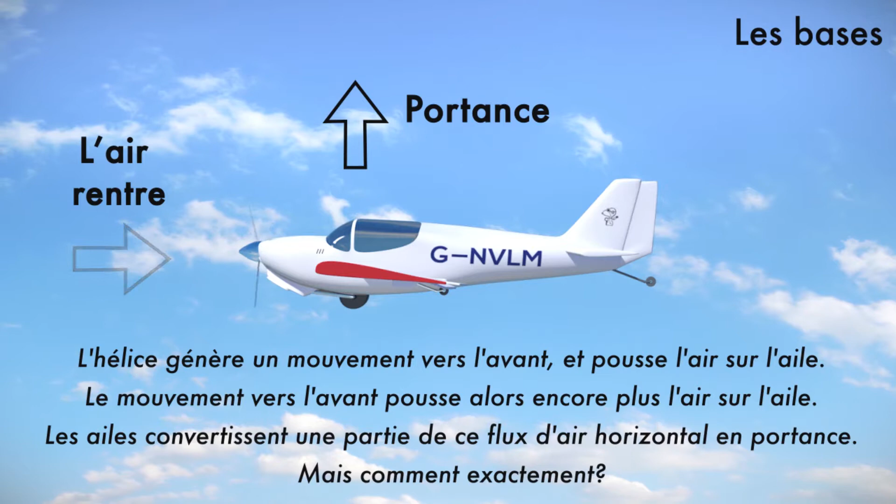In short, planes fly because the propellers push the plane forwards, pushing air over the wings. The wings then convert this horizontal airflow into vertical lift. The debate is over exactly how lift actually occurs.

I present two opposing views as to how planes fly. One view, taught at flying schools, is based on magic. The other view is based on a rational observation of reality.

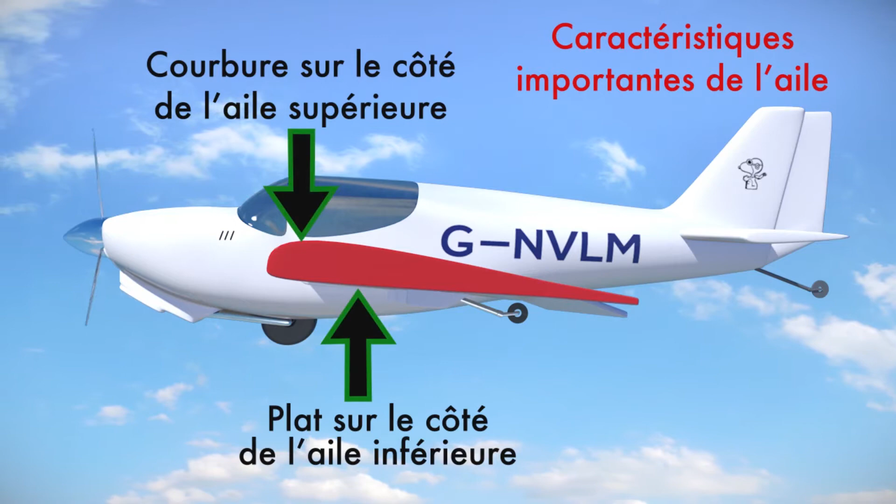Every pilot is taught that planes fly because the upper airflow increases in velocity when it flows on the curved part of the top side of the wing, creating low pressure. This process relies on something called Bernoulli's principles. This low pressure then generates vertical lift. We call this the conventional theory.

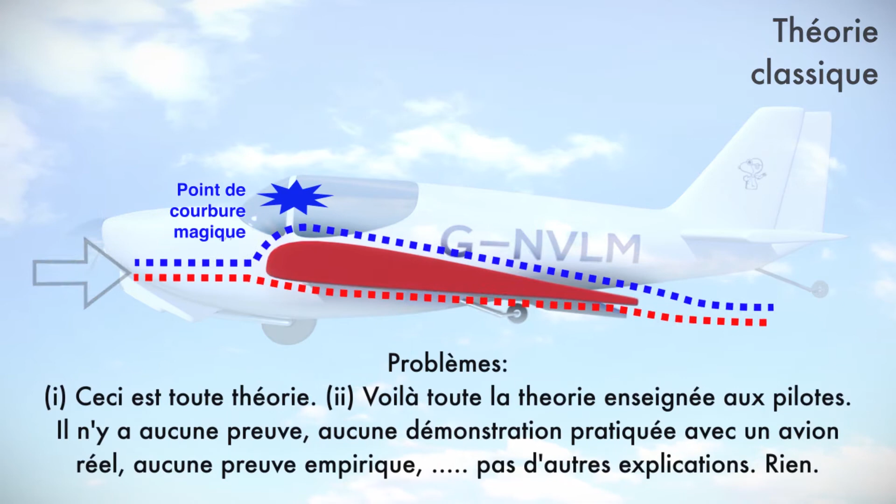There's only one problem. It's total bollocks.

It's obviously utter nonsense because it doesn't correspond to what we see in reality. Specifically, it cannot explain inverted flying where the wing curvature faces downwards, how aerobatic planes can fly with symmetrical wings and thus symmetrical curvature, how some planes can fly with only straight wings and no wing curvature, and how speedboats can generate lift without wings.

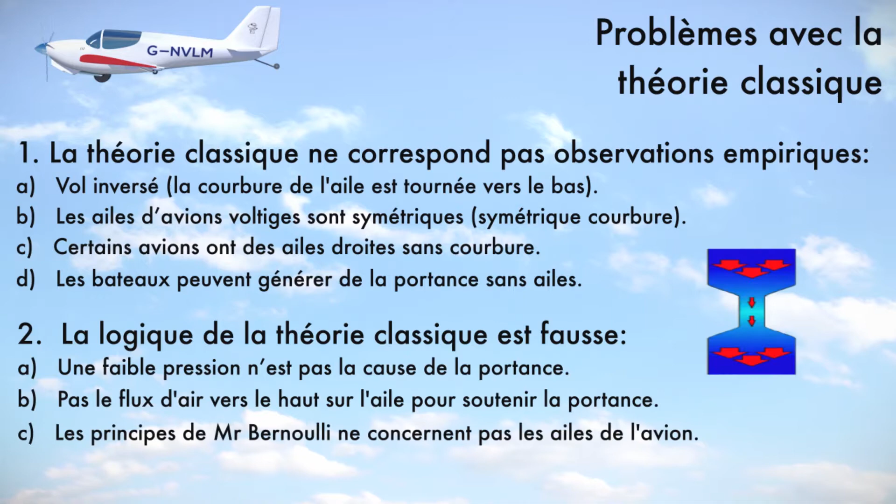Also, the logic of conventional theory is false. Correlation is not causation for low air pressure and lift. There is no upward airflow on the wing to support vertical lift. Bernoulli's principle doesn't apply to aircraft wings because they're not enclosed systems, and this theory can only describe a stall, it can't explain it.

For now, let's just focus on the first of these many problems. The conventional theory cannot explain how planes can fly inverted, as the curvature of the wing is now facing downwards, not up, so the wing should not be able to generate lift and the plane should fall towards the ground. Obviously this doesn't happen as planes fly inverted in the real world, so conventional theory fails.

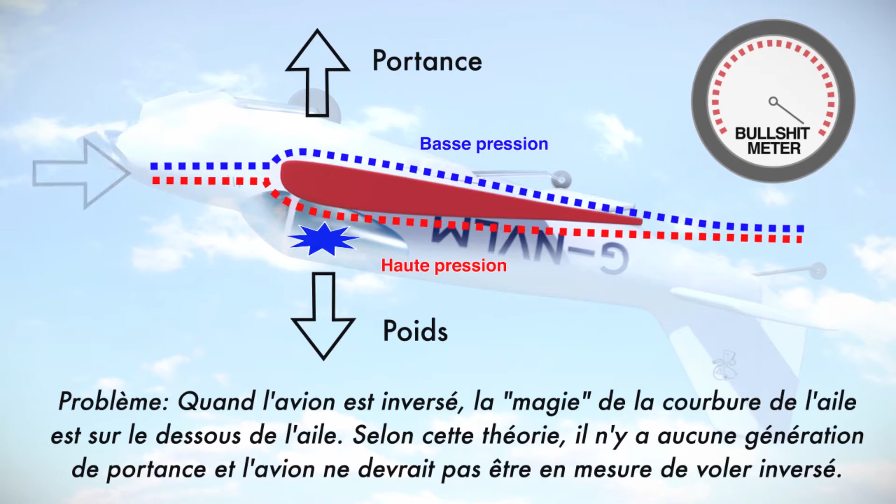Aerobatic planes typically have symmetrical wings with equal curvature on both sides of the wings. This would produce equal lift both up and down according to the conventional theory.

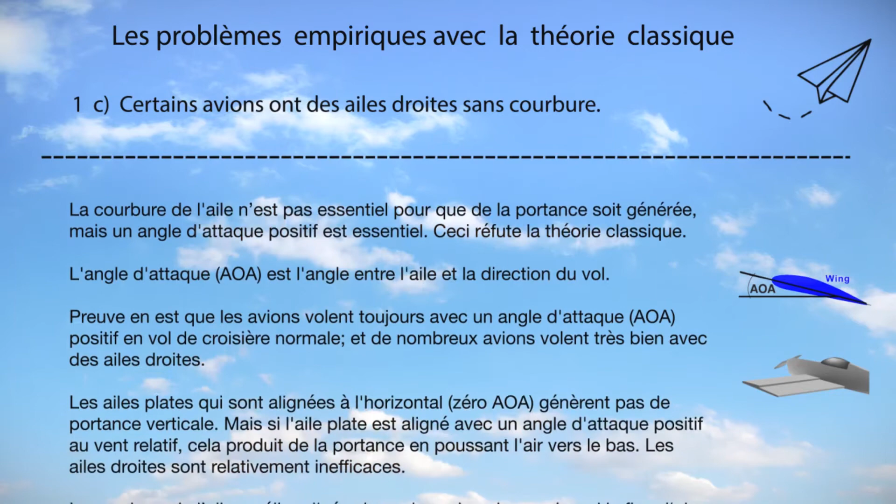Some planes fly just fine with flat wings. Wing curvature is not essential for flight. Critically, lift only requires a wing with a positive angle of attack, that is, a positive vertical angle between the wing and the direction of flight.

Boats can rise out of the water and float on the air for the same reason as planes. As the boat goes faster, it displaces a greater mass of water and air, pushing the boat upwards.

The conventional theory is full of logical fallacies.

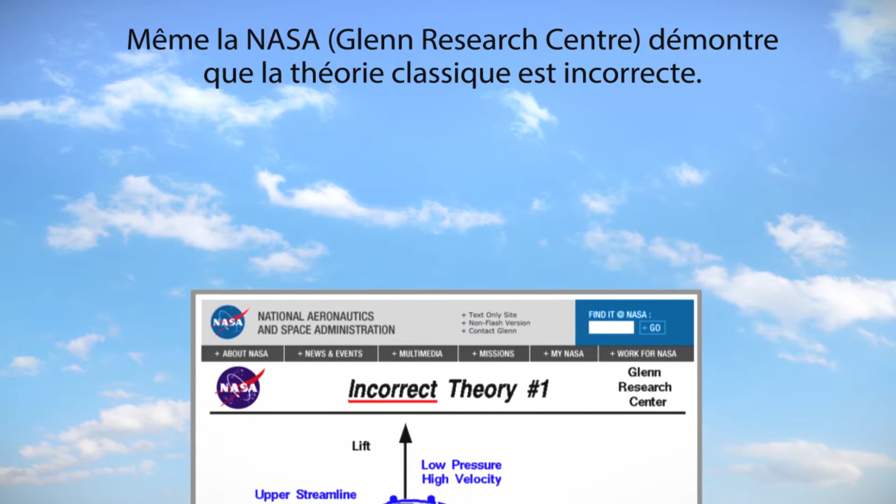Plenty of experienced and reputable people in aviation dispute the conventional theory of flight. Most flying instructors will tell you that the official explanation for how planes fly is incomplete at best. Even NASA claims that the conventional theory is incorrect. Go and take a look at their website.

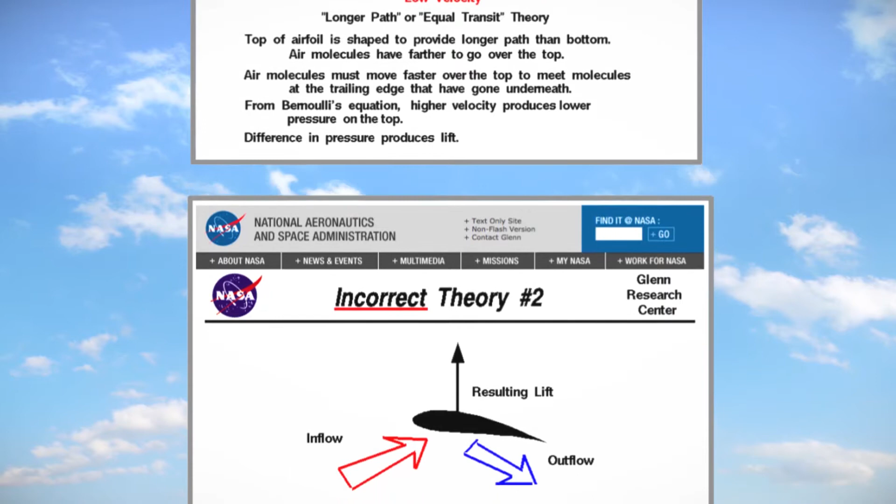The standard diagrams used by the conventional theory actually demonstrate mass displacement. Take another look at this diagram, which every pilot has been taught. It clearly demonstrates the mass displacement theory, with the air mass being displaced downwards. It's literally in your face.

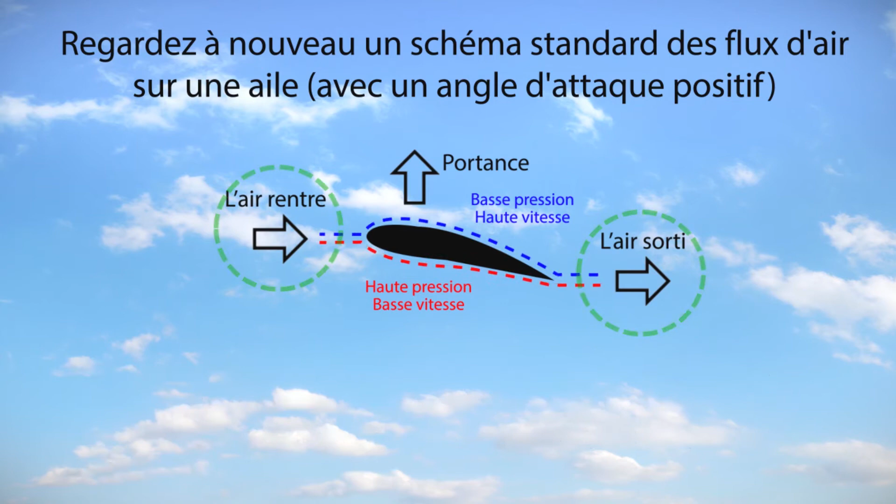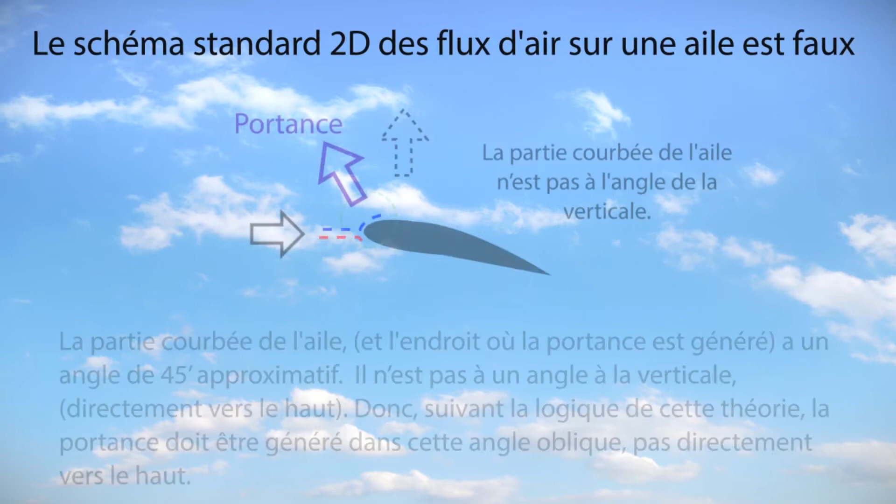According to the conventional theory, the curved part of the wing is where the lift is generated. But this part is facing at an angle to the vertical, not directly upwards. So following the logic of this theory, the lift should be generated in this oblique angle, not directly upwards.

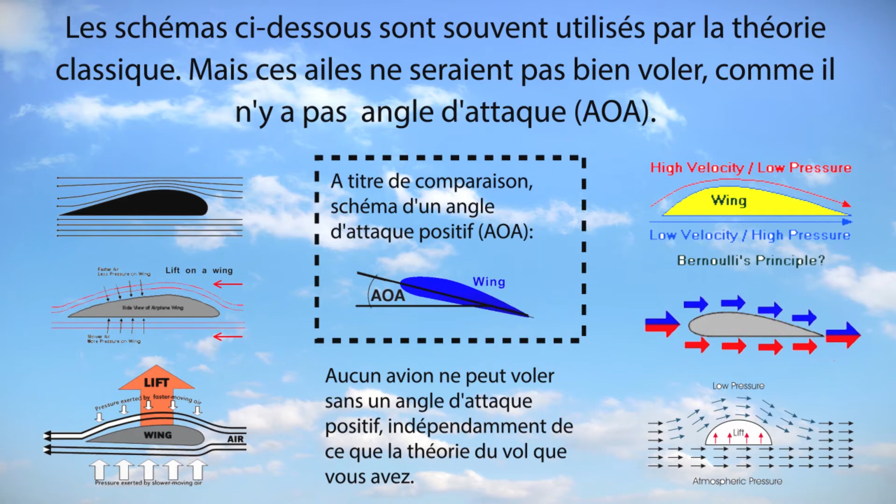The two-dimensional diagrams of airflows and wind tunnel experiments used by the conventional theory are so oversimplified that they're grossly unrealistic and inaccurate. The conventional theory uses diagrams such as these that depict wings that can't fly in the real world. Unrealistic diagrams, unrealistic theory. Garbage in, garbage out.

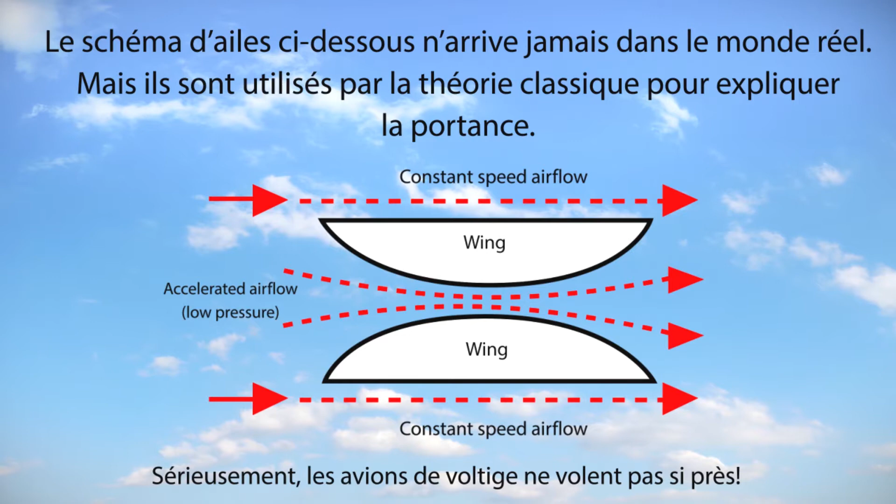Although these are unrealistic, two-dimensional experiments, they demonstrate the logical fallacies of the conventional theory. Strangely, wind tunnel experiments are never used to measure lift and prove the conventional theory to be correct.

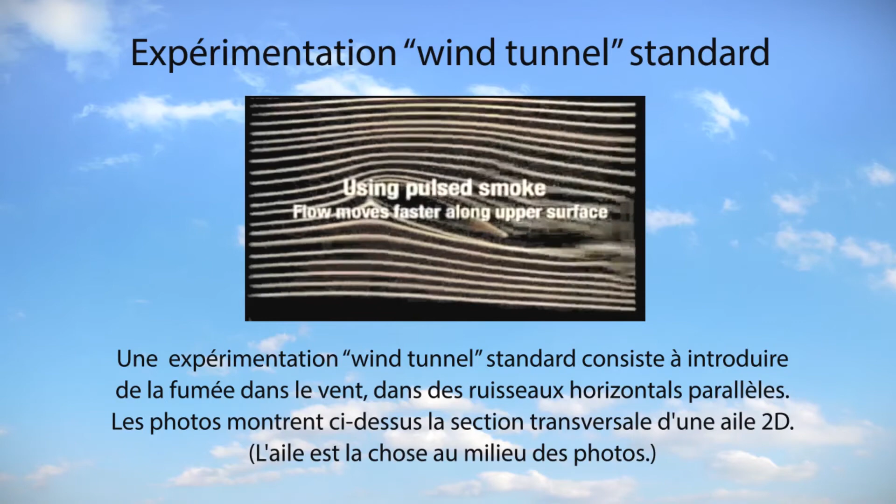A standard experiment involves a machine blowing parallel streams of smoke horizontally across a wing. Note how attention is limited only to the airflows that are close to the wing. The difference in air speeds between the upper and lower airflows are not very significant, so this cannot be a major cause of lift.

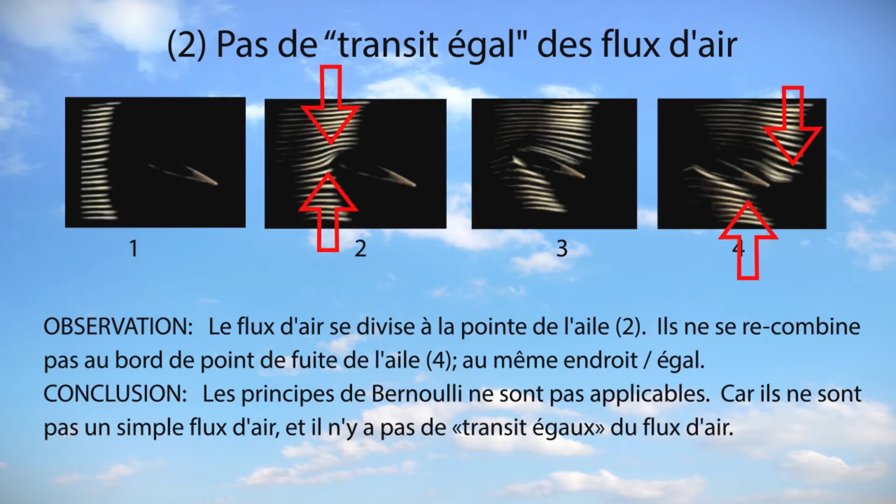This shows that the airflow splits in two at the leading edge of the wing and doesn't rejoin later. The air is not one stream of air, so Bernoulli's principles do not apply. The upper airflow doesn't increase velocity in absolute terms, so it cannot produce lower air pressure relative to this air mass above it, hence it cannot generate lift.

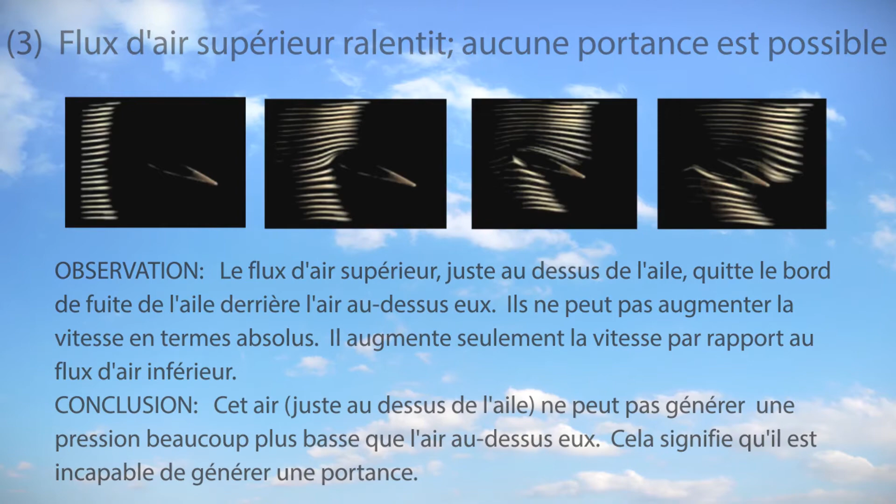Just to reiterate that two-dimensional wind tunnel experiments are so oversimplified that they are actually wrong. Airflow is three-dimensional.

These theories and principles of lift can be easily tested. Next time you're in a car, just stick your hand out of the window and see what causes lift.

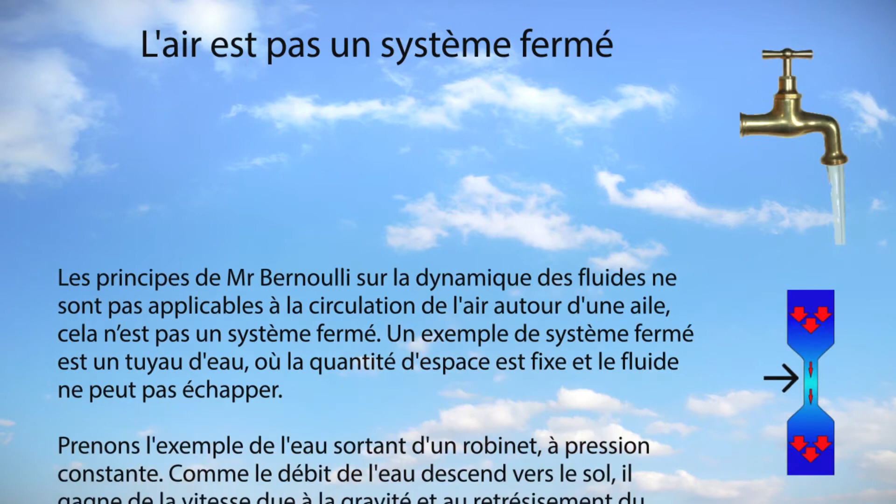Now we revisit the problems with Bernoulli in more detail. Bernoulli's principles are really aimed at describing fluid dynamics in enclosed systems, things like water pipes. Bernoulli cannot be applied to fluids like air and their interactions with wings, as it is not an enclosed system.

There are also two more conceptual problems with applying Bernoulli ideas to wings. Namely, these principles are most appropriate for moving fluids, not static air. The often quoted Bernoulli paper experiment is inappropriate as it involves paper, not a metal wing of a plane.

Bernoulli's logic doesn't translate to planes in flight.

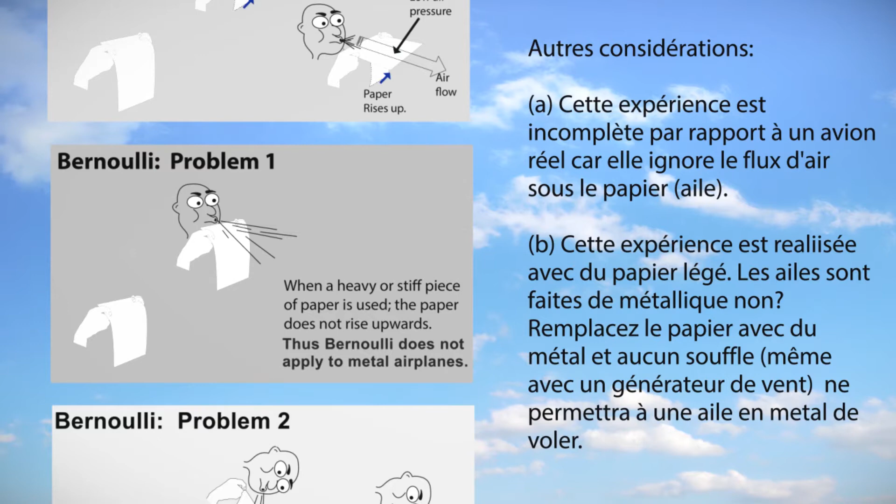Bernoulli lived in the 18th century. Who knows what he would have thought of people applying his ideas to planes?

Aviation can't claim to use Bernoulli's principles, as it doesn't actually use the Bernoulli mathematical formula and equations. One problem is that the paper never rises higher than the point of the blowing air, so there's no way for a low air pressure wind to generate vertical lift on a wing.

The critical factors that influence vertical lift on a wing do not include low air pressure on the top of the wing.

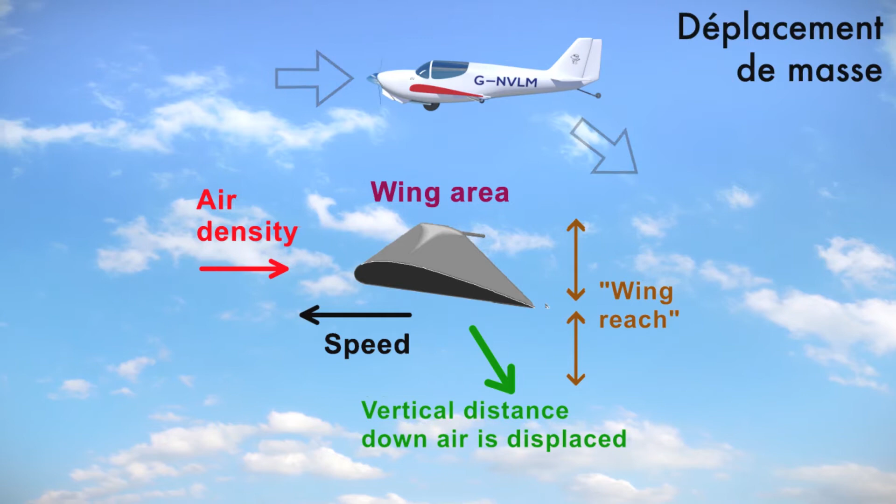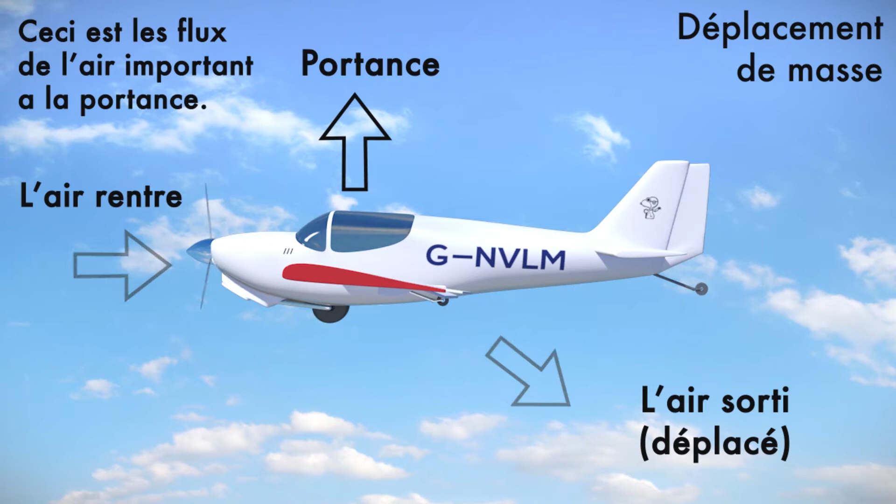Mass displacement theory is based on the same principles that explain why hot air balloons and boats float, namely that they displace a mass of air or water that is equal to their own mass. If they don't, then they sink.

It is generally agreed that planes' wings displace some air downwards that help them stay airborne. The debate here is on how much lift is generated by mass displacement.

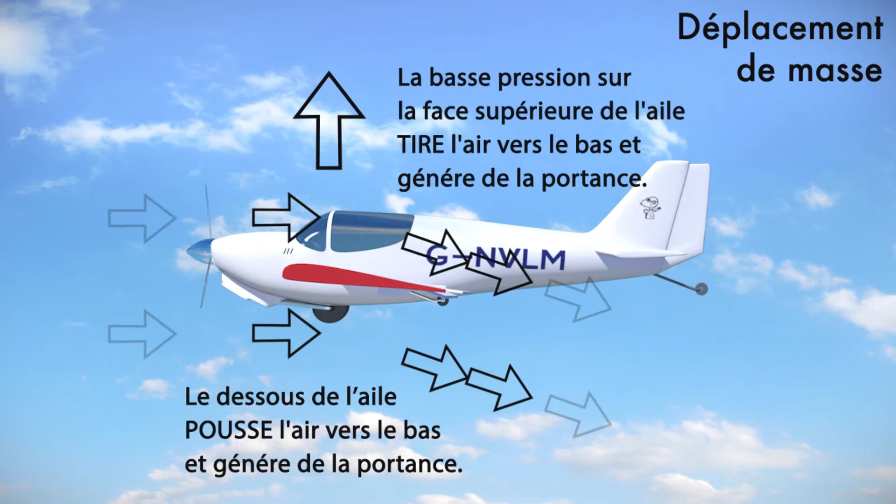In normal flight, the wings generate lift in two ways. Firstly, the underside of the wing pushes air down, as reflected by the high air pressure under the wings. Secondly, the curved upper side of the wing also pulls air downwards, also generating lift. This is reflected by the low air pressure on the top of the wings.

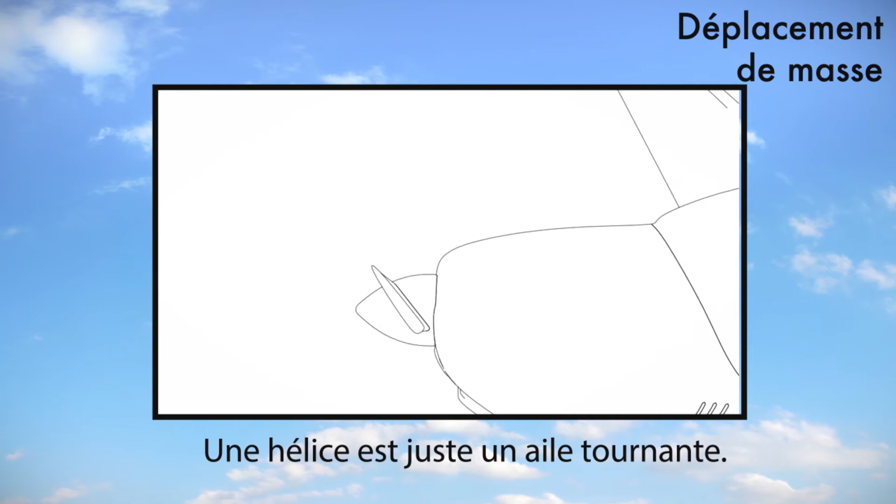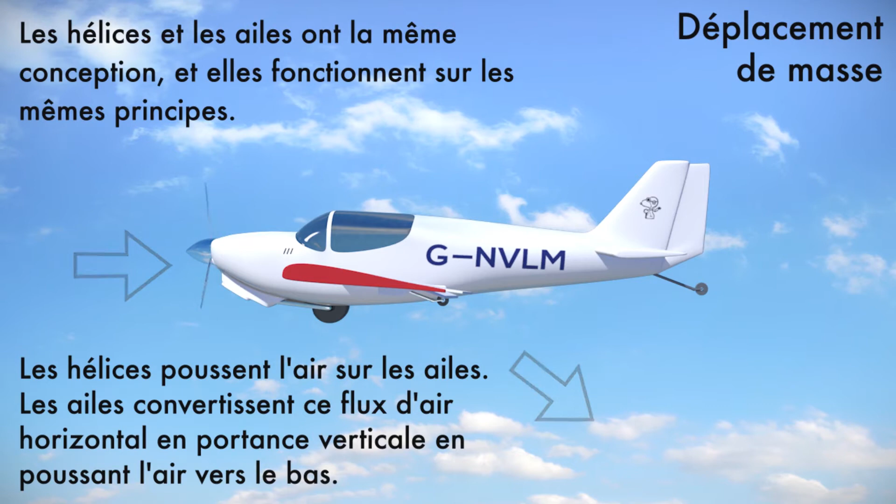Propellers and wings have the same basic design and functions. Propellers push air onto the wing. The wing then converts this into vertical lift by pushing the air down. Or put it another way, the moving propeller is pushing stationary air backwards. The stationary wing then pushes the moving air downwards.

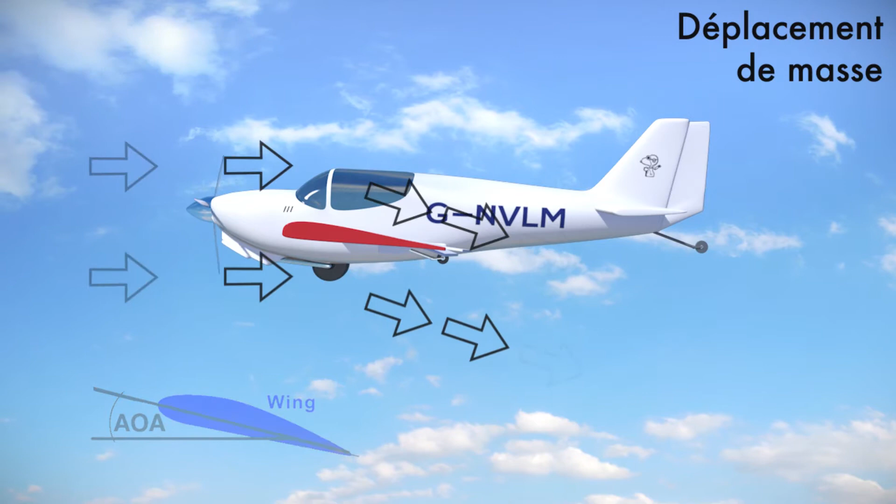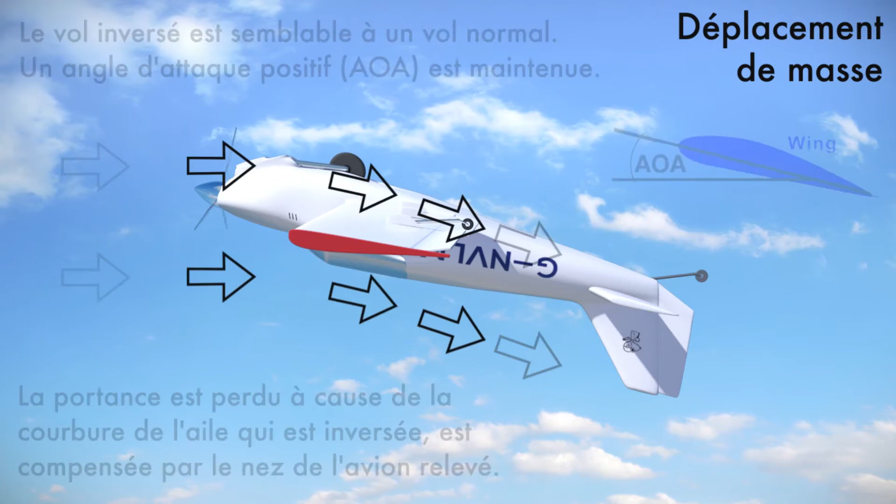In inverted flight, the wings still function in a similar way to normal flight. The nose of the plane is raised so that the wings maintain a positive angle of attack. The wings continue to displace air downwards, but are less efficient as the wing curvature is also inverted. As the propellers are angled slightly up, this boosts lift by pushing more air downwards.

Newton's third law states that for every action there is an equal and opposite reaction. Mass displacement theory is consistent with Newton's third law. The underside of the wing pushes down on the air, and thus the reaction from the air pushes the plane up.

On the other hand, the conventional theory makes little mention of Newton's third law apart from discrediting it as the cause of lift, but that's all. Also, the conventional theory makes no reference to the energy process involved in generating lift. In reality, the energy from the engine is used to push the air mass down and the plane up.

Now we take a look at the physics of flight at the molecular level. At rest on the ground, the forces on the plane are in balance.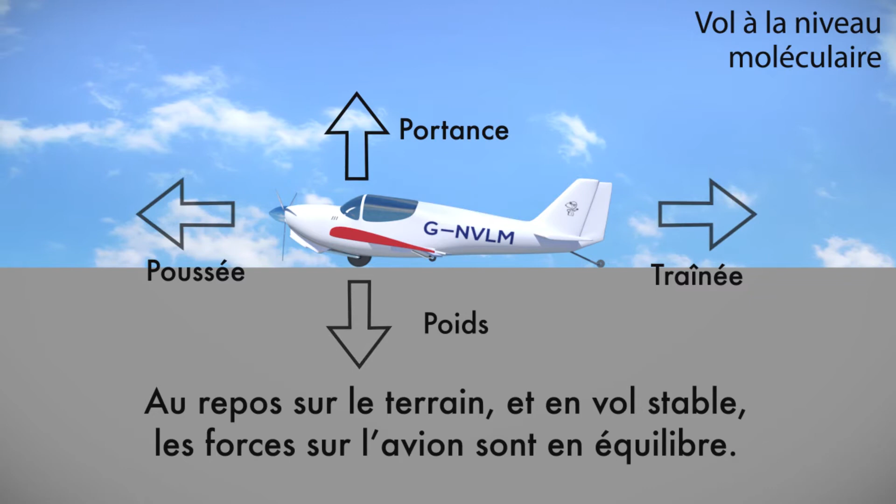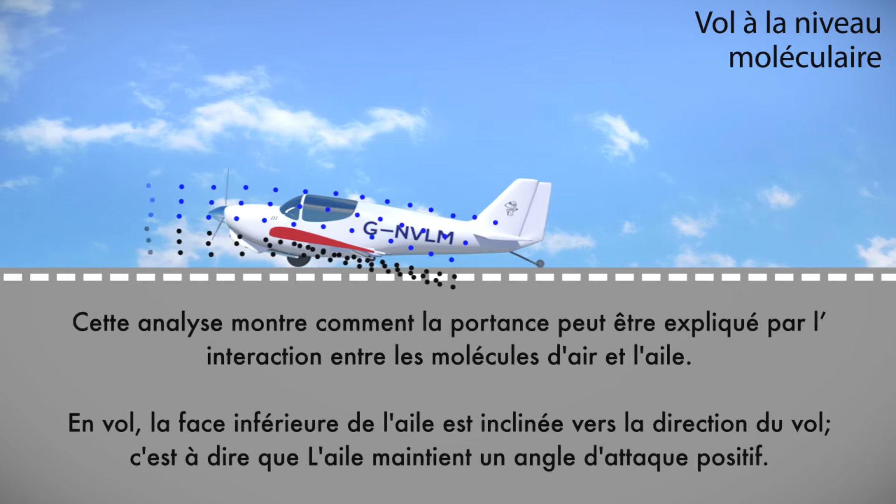This demonstrates how lift is a result of the interaction between the air molecules and the wing. The dots in this animation represent air molecules. In flight, more air molecules hit the underside of the wing, and each molecule strikes the wing with a greater force compared to the top side of the wing. This generates lift.

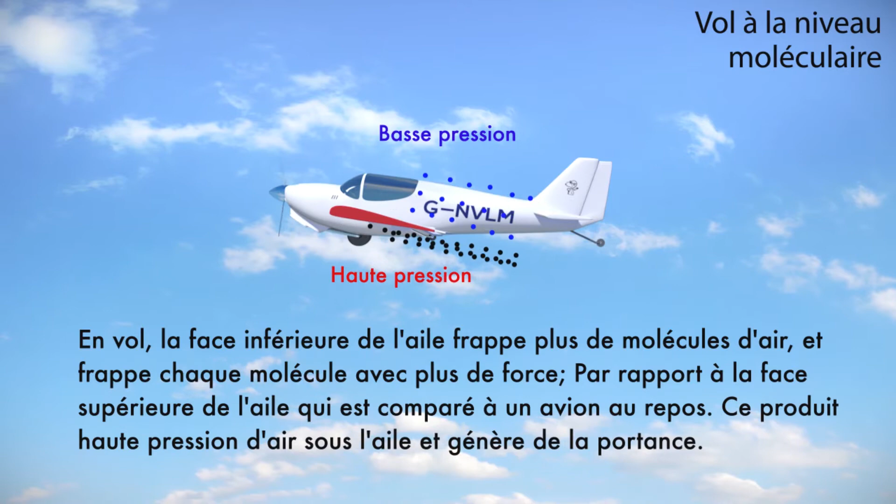The top side of the wing is angled away from the direction of flight, so it hits less molecules and hits each molecule with less force. So in flight, the plane is coming into more direct contact, more aggressively, with a greater mass of air underneath the wing than above it. This generates lift.

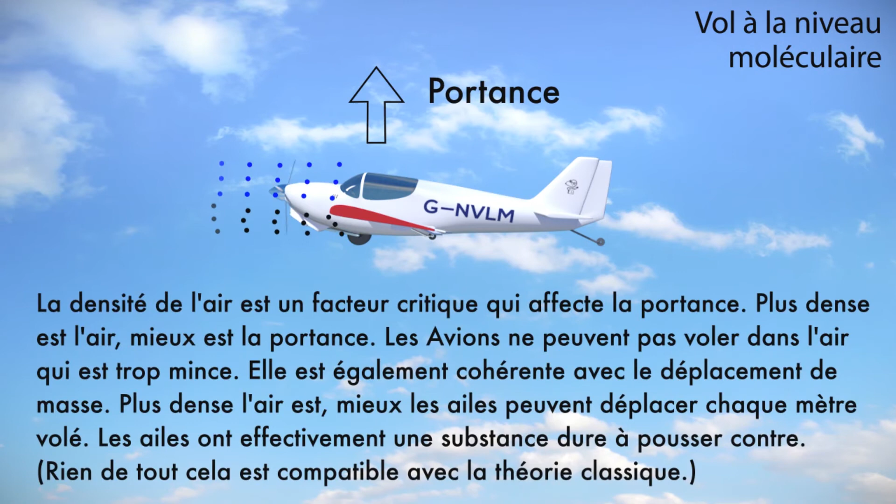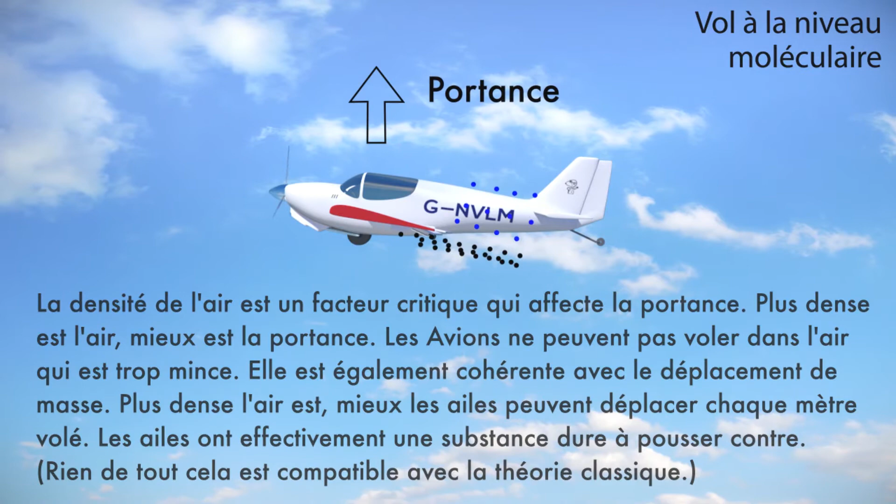Consequently, the molecular explanation of how planes fly is consistent with the mass displacement theory, but not the conventional theory.

Speedboats can rise out of the water and float on the air. As the boat goes faster, it displaces a greater mass of water and air, pushing the boat upwards. It's clear that birds stay airborne by pushing enough air downwards to counterbalance their own mass.

Wing vortices and backwash. Physical evidence for mass displacement is the backwash behind the plane. More evidence of aircraft backwash can be seen in these big Russian bombers flying over the tops of the clouds.

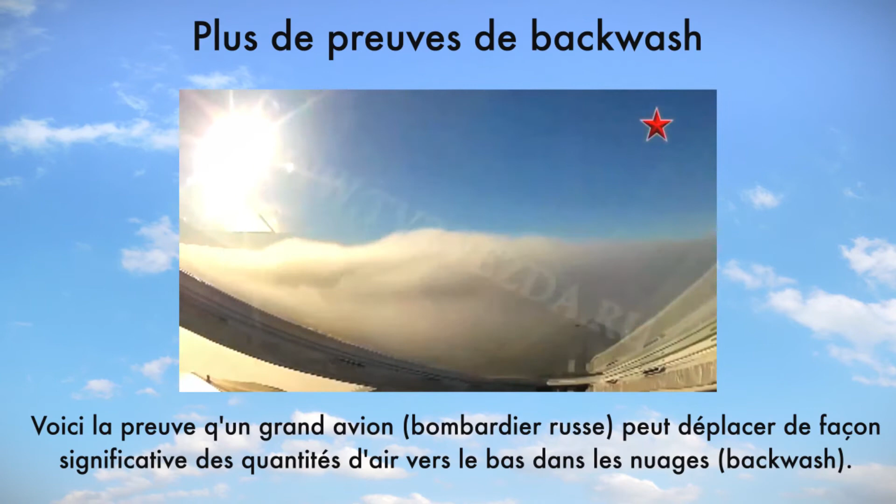The conventional theory makes little mention of wing vortices or backwash, except to say that they are a factor affecting drag.

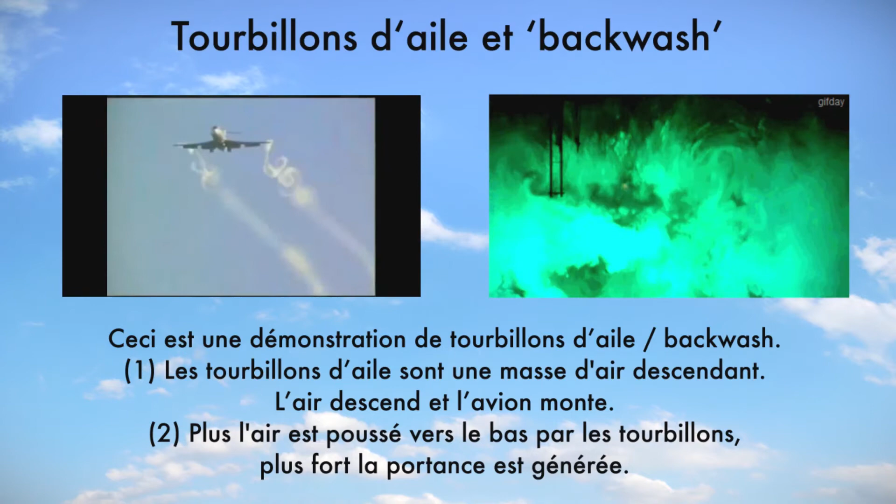Vortices are a critical part of how a plane generates lift. This video demonstrates the wing vortices pushing the air mass down and backwards. Or to put it another way, these vortices is air going down. The equal and opposite force is pushing the plane up.

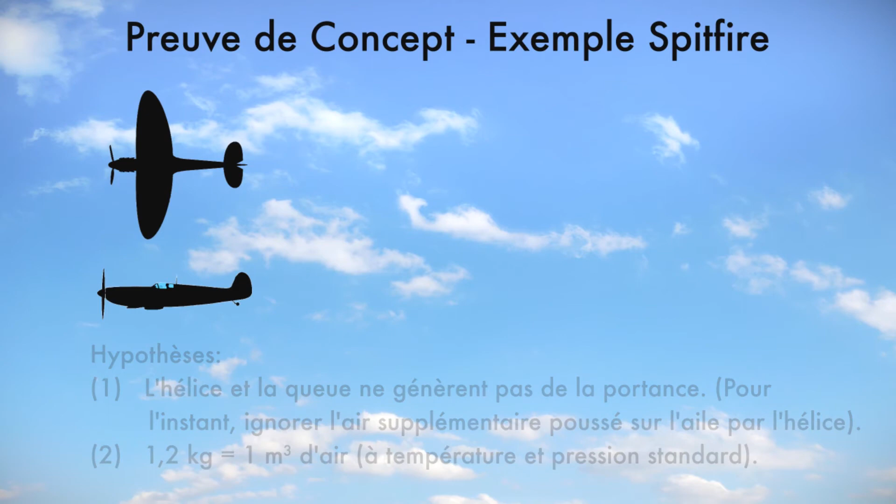These estimates are based on a few simple assumptions. A Spitfire flying at 400 km an hour needs to displace 19 cubic meters of air every meter flown.

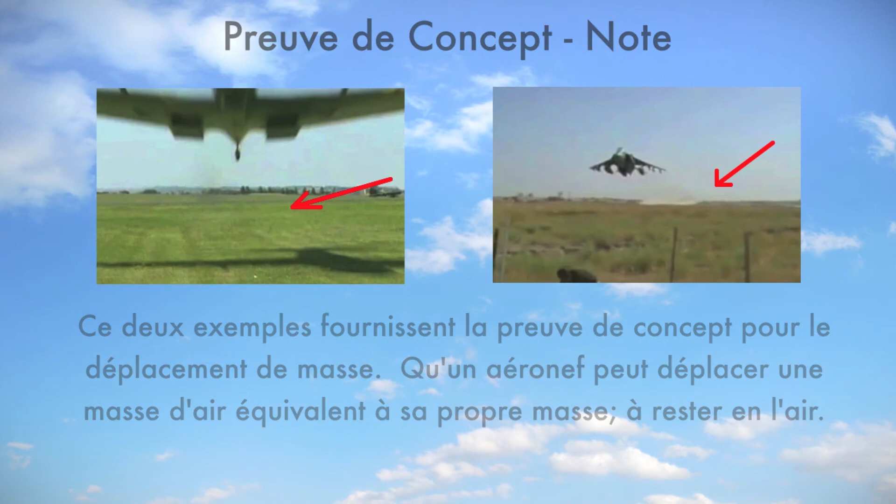These two examples provide proof of concept for mass displacement. Conventional theory provides no explanation of these dynamics.

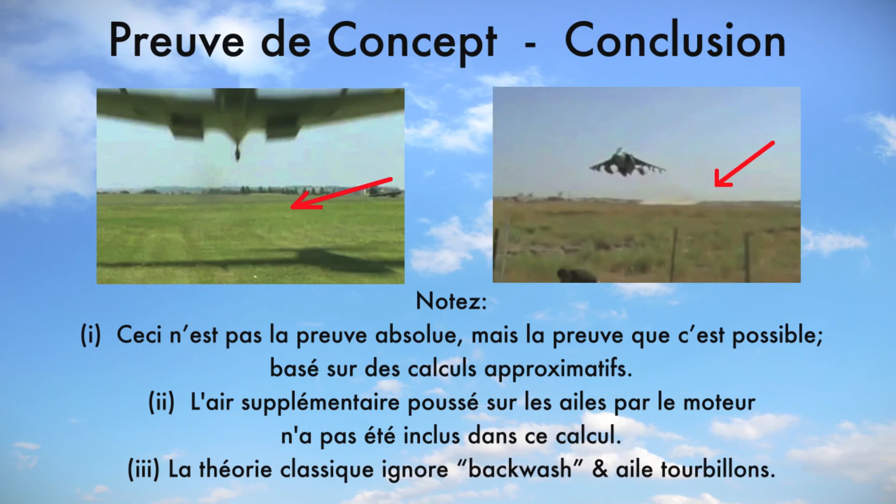These two examples are compared. The Harrier has 4 times the mass compared to the Spitfire, yet the Harrier stays airborne while flying only twice as fast as the Spitfire. The Harrier is about twice as efficient at displacing air.

There is a non-linear relationship between speed and lift. As planes fly faster, the physics of flight change and lift increases disproportionately with speed. Stronger wing vortices and greater air viscosity make it increasingly easier for a plane to displace more air every second and every meter flown.

The faster the aircraft, the less wing curvature matters.

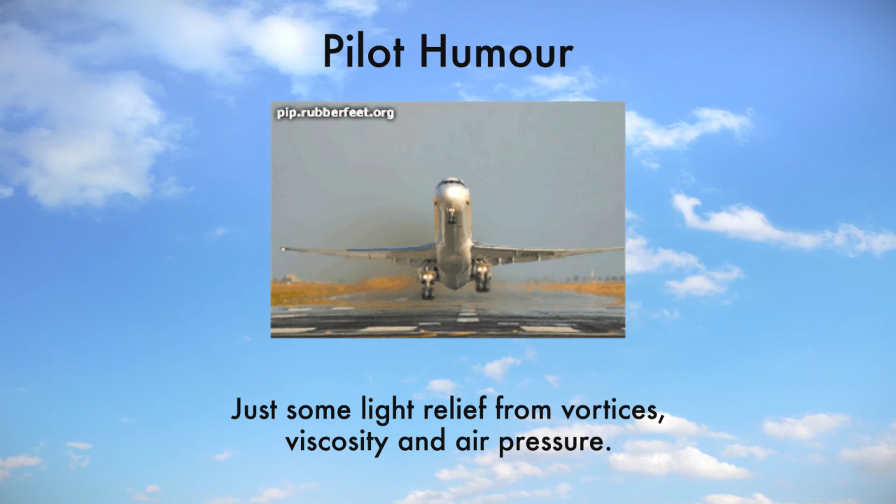Now, some practical tests of stalls to prove mass displacement. Take 2 identical planes, except one has a greater mass.

As the speed of the planes declines, a constant altitude is maintained by raising the nose of the plane. The plane with the greater mass will always stall first. The plane sinks like a stone due to gravity.

Mass is the only difference between the 2 planes in this example, and thus the only explanation for the stall.

Take a plane in stable, cruise flight under normal conditions. Add an additional person to the plane.

If nothing else has changed, the additional mass would make the plane lose altitude. The plane starts sinking.

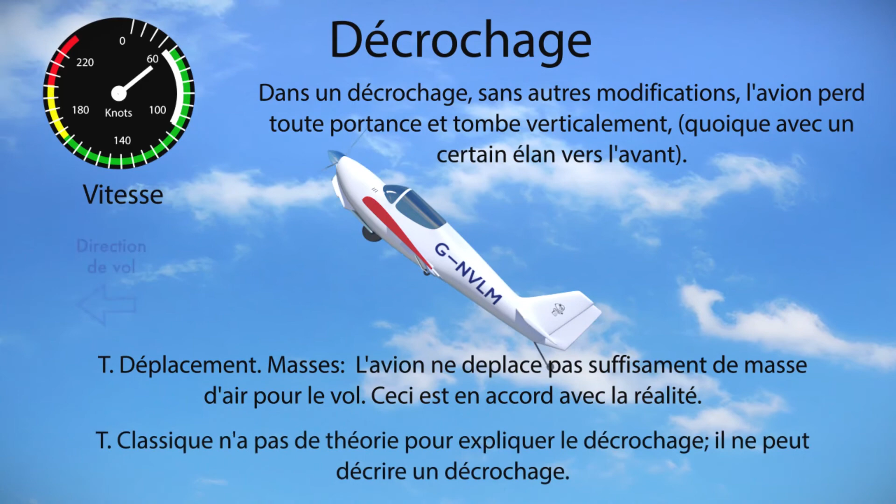In a stall, mass displacement explains the plane is no longer displacing sufficient air mass to remain afloat, so it sinks. The conventional theory has no theoretical explanation for a stall.

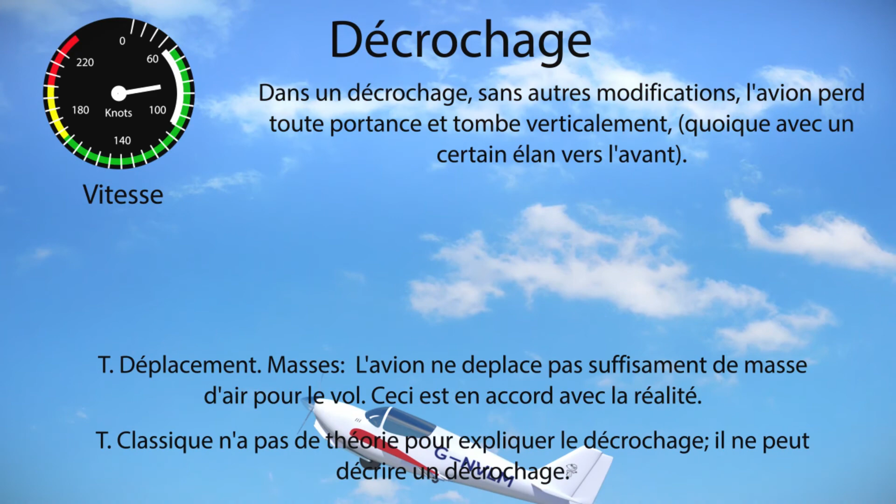Mass displacement can explain the dynamics of a descent, whereas conventional theory fails again, as it predicts that a higher speed means more low air pressure on the wing, and thus more lift.

In a vertical descent, mass displacement theory is consistent with reality, whereas conventional theory wrongly predicts that the high speed and high pressure differential on the wing would generate lift.

The logic of both theories is consistent with the dynamics of a plane banking in flight.

However, only mass displacement can explain the dynamics of how the ailerons perform in a bank. The conventional theory fails to explain how the ailerons can affect the low pressure at the tip of the wing to induce the plane to turn.

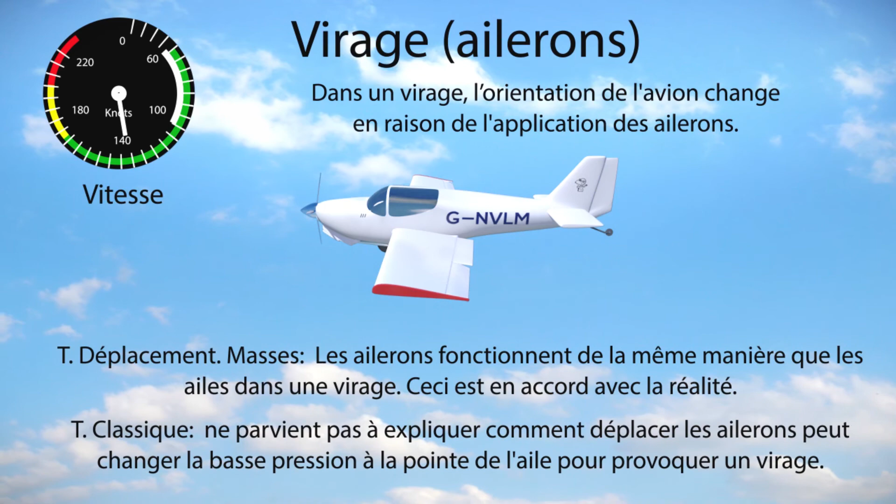Mass displacement easily explains the dynamics of how flaps affect flight, but the conventional theory fails to explain how flaps can change flight dynamics as seen.

Ground effect feels like the plane floats down the runway. This demonstrates the mass displacement theory, even to the skeptics. Conventional theory has no explanation of how ground effect can impact lift within its theoretical framework.

The influence of wind on aircraft is consistent with mass displacement. On the other hand, conventional theory doesn't explain how wind impacts flight within its theoretical framework.

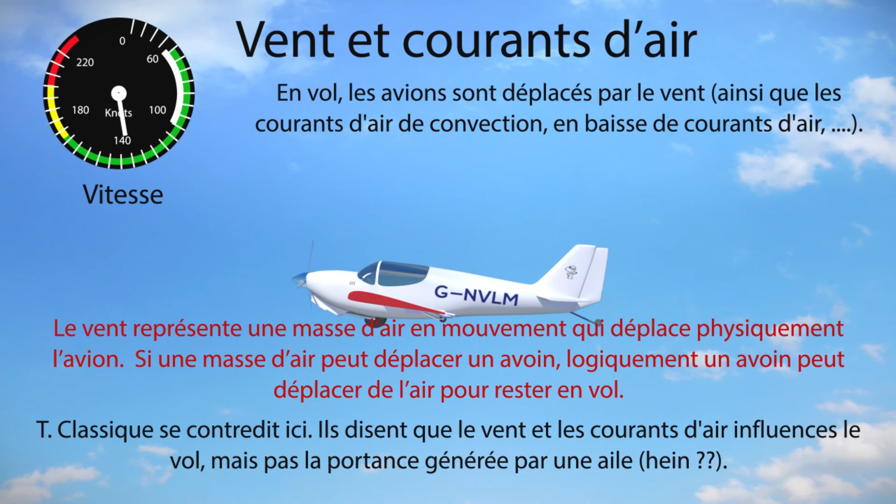The results of these practical tests conclusively show that mass displacement theory is consistent with all the maneuvers made in flight, whereas the conventional theory is inconsistent with or fails to explain almost all of these flight maneuvers.

At flying school, they only teach the conventional theory of how planes fly for a plane in stable cruise flight. They never explain how it works in the different stages of flight or different flight maneuvers.

So what? Well, if you're flying, then your pilot doesn't know the true reasons how and why the plane stays airborne or stays afloat. No wonder so many planes still crash.